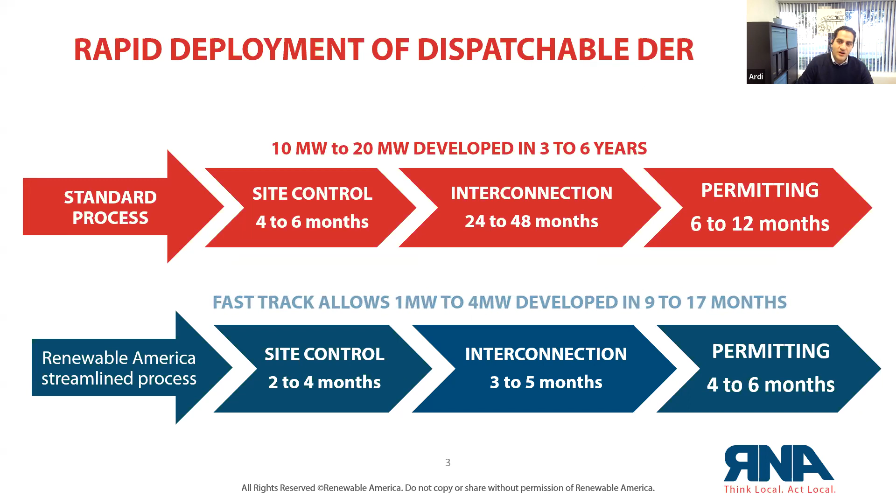Great. Okay. So I'd like to present today what we have worked on in the last 2 years, what we call a streamlined process to deploy DERs. This is an overview of how the market looks today, especially in California. If we compare two processes, bigger development, and I'm just focused here on 10 megawatts to 20 megawatts, compared to smaller projects, maybe we can call them small utility scale, 1 to 4 megawatts, you can see that the deployment can be much faster. Here's a comparison between all those activities, and the biggest change is interconnection and, of course, permitting. I will explain more about this later.

A little bit about what we have done in the last 2 years. As Woody mentioned, these are all grid side projects, or for other folks that might know it, front of the meter.

We have over 180 megawatts of solar projects throughout CAISO territory and 298 megawatt-hours of energy storage under development. We have assessed over 1,000 parcels, have been in touch with more than 400 landowners, and the projects are in about 30 locations in general. They have different stages of development, and here you can see where all of that is; whoever is interested can go on our website. There is a good overview, and we're keeping it updated.

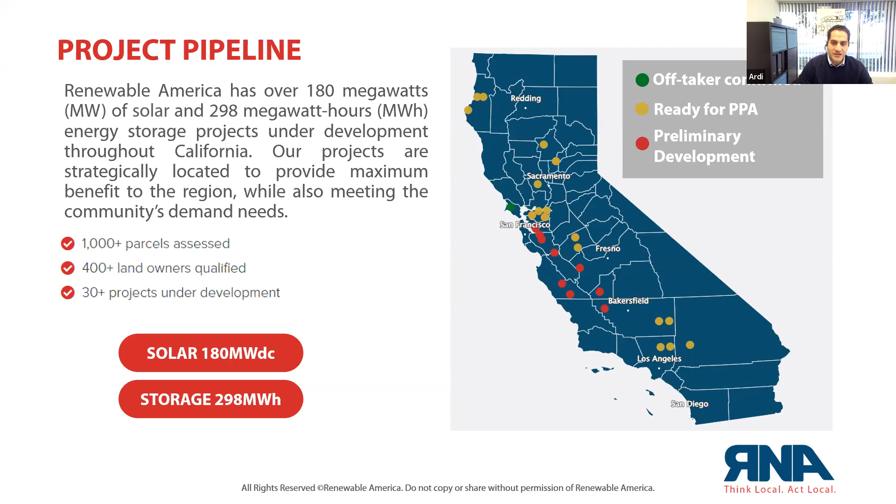Now, one of the biggest challenges, and we keep getting into that conversation, is RA. Resource adequacy is one of the most important things today, especially for CCAs, and we do understand that. And I decided today to make one slide to show the different ways that a DER would have, depending on how it starts with the interconnection agreement. So what I showed you in the slide before, the fast track deployment that allows us to be much quicker, would limit us to just 2 scenarios.

So we would be an energy only resource, and then there would only be a possibility to go through an annual DGD assessment, which is totally out of our control. It's basically CPUC allocating DGs into that portfolio, and then investor-owned utilities would have to choose that substation. And unfortunately, in the latest one, 2020, CPUC has not allocated any DGs. But we don't know for sure. We're hoping it's going to continue in 2021. This path was not working.

Now, what is exciting for us, we want to show here, there is a way after COD, so the project reached commercial operation date and is already operating. There is another process called transmission planning deliverability allocation, so-called TPDA, and that would allow us within 5 months, starting every November, to get the RA value and the RA piece. So what we are offering, and that maybe could be a great idea for any other developer or other CCAs to think about, is to purchase projects in an early stage without RA, and after COD get the RA piece.

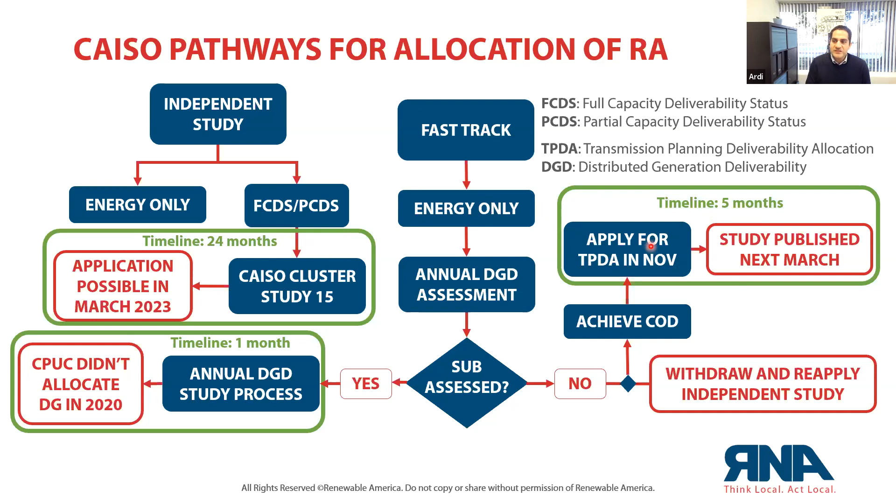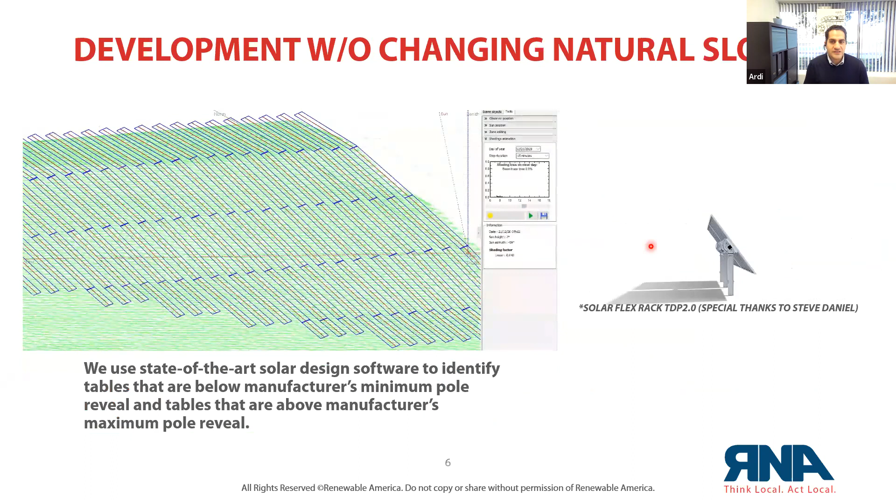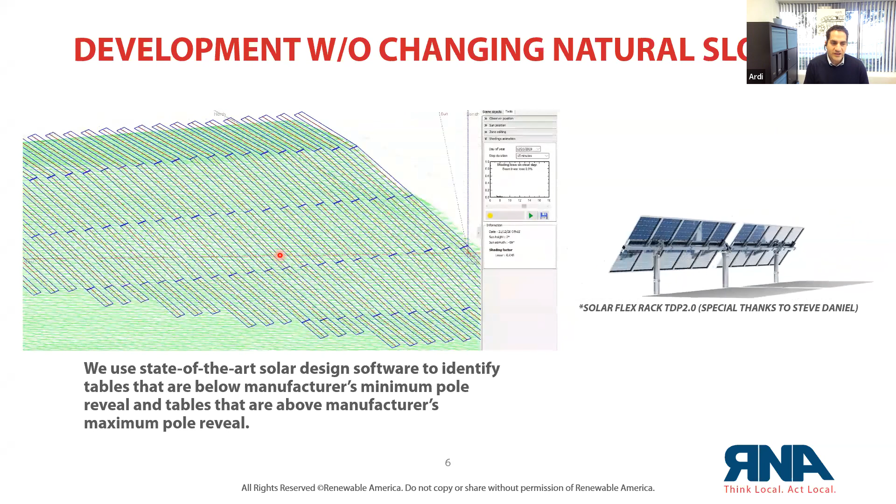We also want to show that in our development, we pay a lot of attention to how we can mitigate any kind of impacts to the land or to any other resources there. And we are using pretty good software that allows us to minimize grading. This is a single axis tracking system that we are showing on the right side, and on the left side, a screenshot from the software that can, without changing the natural slope of the land, so we avoid any kind of grading, install those systems. It makes it much easier for the CEQA process, and we also believe that allows us to continue in the best way the deployment of DERs.

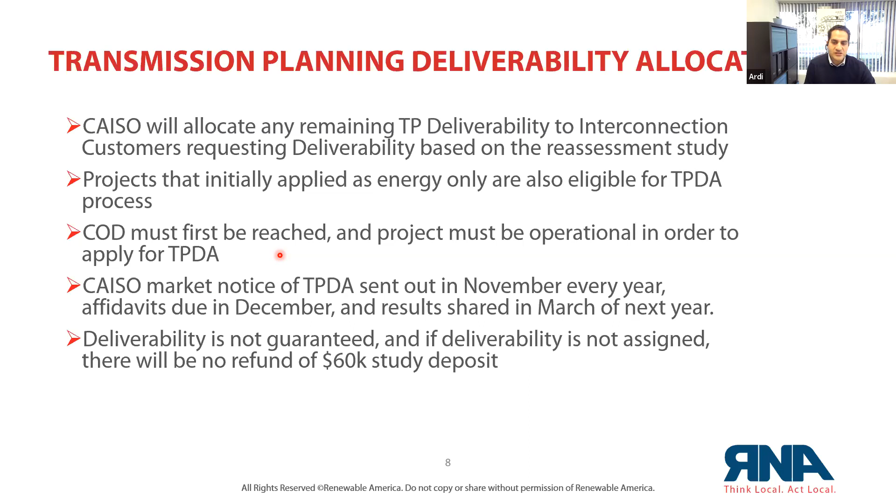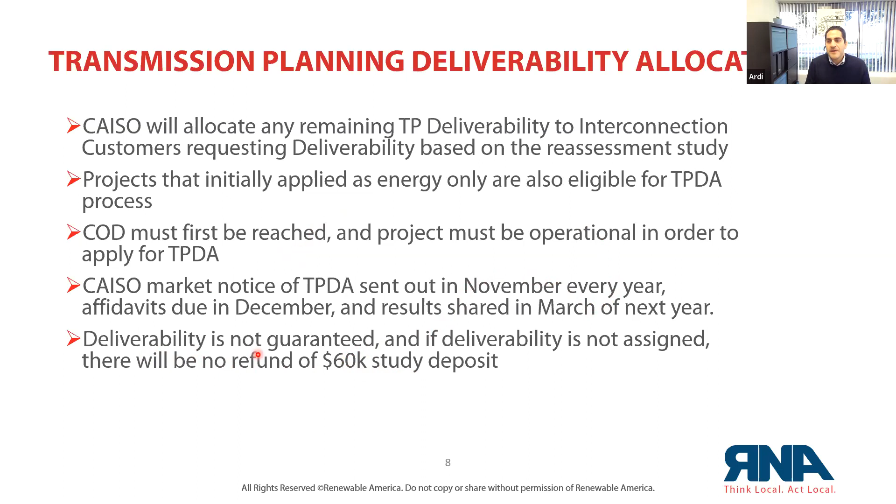Now, I want to tell a little bit more about this transmission planning deliverability allocation, the TPDA. CAISO will be able through this process to assess the capacity deliverability possibilities throughout CAISO. The process is outlined here. As I mentioned before, every year in November, we can get started with it, and the results will be shared the next year in March. Instead of waiting 2 years, we can do it within 5 months. And the deliverability study deposit is about $60,000. So it's all reasonable. Of course, there is a possibility that no deliverability will be assigned, or the cost is just too expensive. Of course, we as a developer would take that burden.

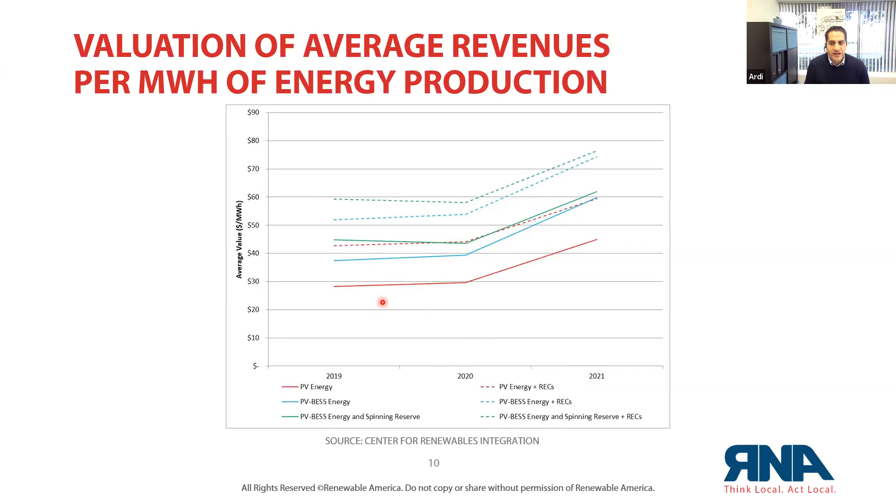This project has already been vetted by the PG&E CMEP team, and we're talking to VCE about it at this particular moment. It's just an example of how we could continue with other places and other DER projects that have the opportunity to become community microgrids as well.

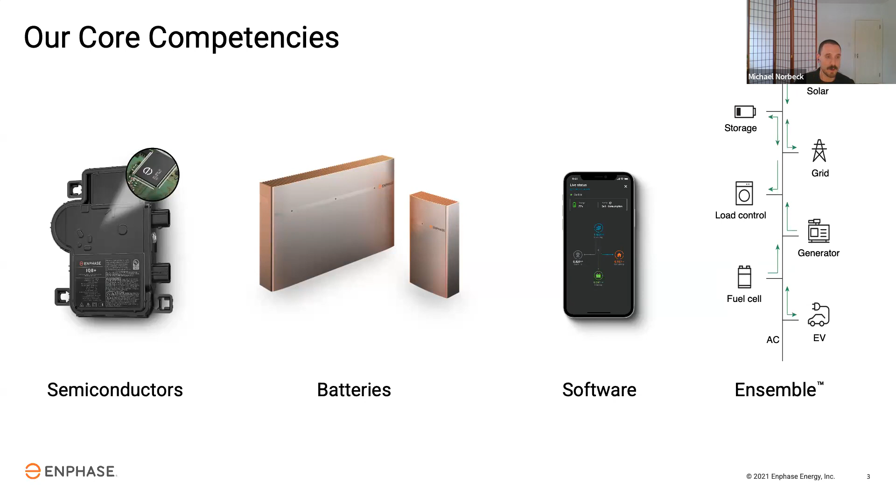And then we also are in the final stages of purchasing Clipper Creek, which is one of the largest EV smart charger manufacturing OEMs. We will be finishing that acquisition later this month, but essentially that brings a whole new set of capabilities under our load management framework, which should be very powerful for customers.

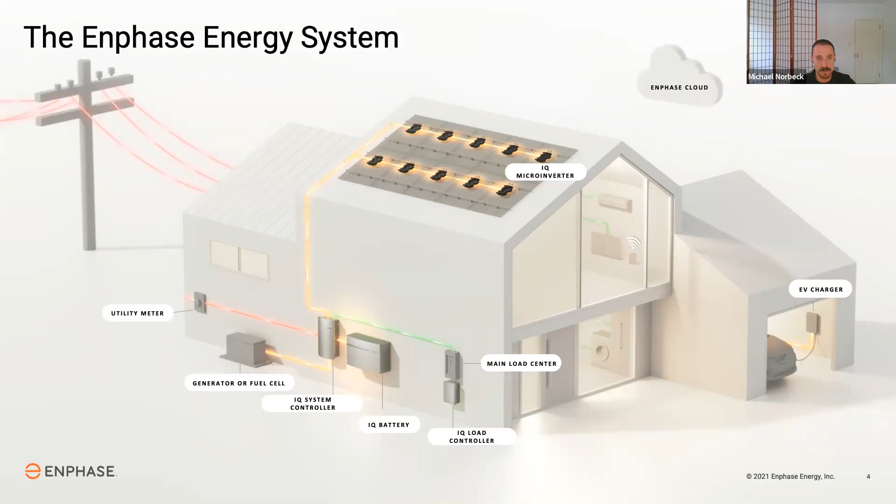So a little bit more about our software. When we say autonomous decision-making of DERs, this essentially means the customer can set different profiles for how they want their system to operate. I want to maximize my savings under a time of use tariff. I want to maximize my backup capability in the event of a grid outage. I want to maximize the amount of solar that I consume on premises and minimize my exports to the grid.

I want to make sure that if a storm is coming, my system defaults to charge up my battery as quickly as possible and leave it at a steady state to help me power through a potential outage. All those different customer preferences can be translated into decision-making at the DER level. So how does the solar and the battery and other controllable loads at the customer premises interact to achieve that desired customer end state? So our software does that.

This allows us, of course, also to seamlessly transfer the customer on grid and off grid. So if there's a grid outage, the customer can island safely without any glitches, keep all the appliances running, keep the internet on. When the power comes back on, they seamlessly transition right back onto the grid. The user can control the settings for their devices via cloud architecture enabled by the software. It's a pretty cool piece of technology.

One thing I didn't mention is we are now launching the first microinverter, really the first inverter period, that allows for daylight solar backup. As a lot of folks may know, if you have solar only at your house and the grid goes out, your power doesn't stay on. It creates an unsafe operating condition if the solar system can't island, and traditional solar inverters don't island. So our new IQ8 inverters, to get a little wonky, really allow solar backup during daytime if there's a grid outage. It's a full microgrid forming inverter. That's coming soon, a pretty cool product. It just allows us to deliver resiliency and bill savings to more customers, even if a battery isn't really on the cards for them.

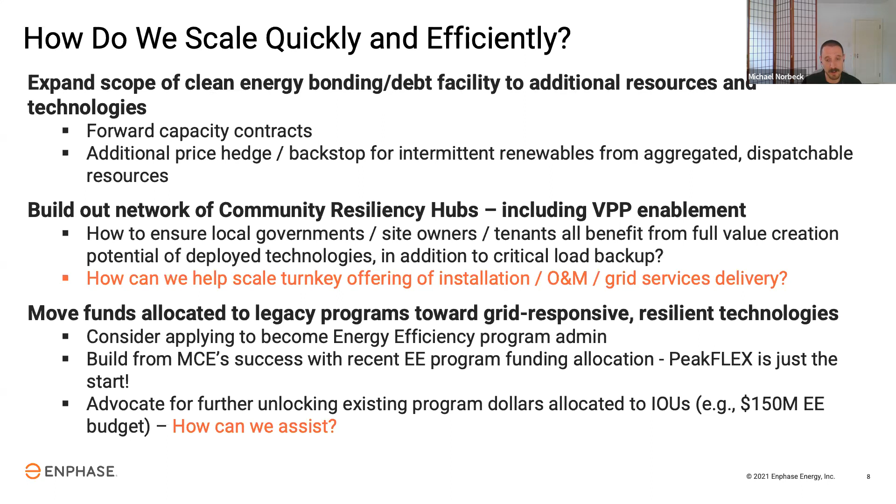We are going to move next to our CCA panel. Before we do, we do have some questions coming in, and that's great. Already starting to see a little bit of a theme on questions around yesterday's CPUC decision on NEM. So CCA folks might want to touch on how that might impact things.

I would like to move on to introducing our CCA panel. We're going to hear first from Eric Little, Director of Regulatory Affairs at the California Community Choice Association. Then we'll hear from Jim Bach, Distributed Energy Resources Manager for MCE, and then JP Ross, Vice President of Local Development, Electrification, and Innovation for East Bay Community Energy. First, let's go to Eric. Eric, the floor is yours.

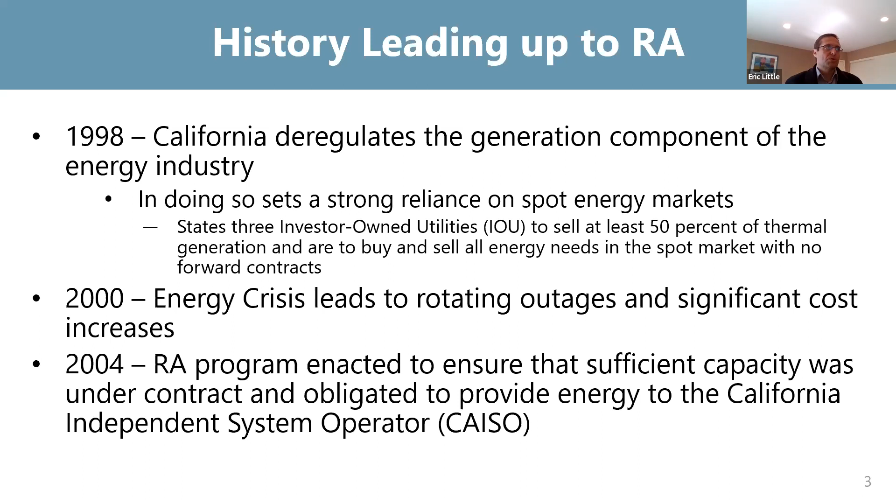So the RA program really looks at a fleet of resources necessary to reliably operate the grid, and that if only that set of resources showed up, would the grid be able to operate reliably? So it meant looking not only at the peak, but all hours. And in looking at all hours, they use some methodologies to try to deal with that.

Obviously, if you meet your peak load with resources that are available 24/7, you are well over procured for the hour of the lowest load. And so there were some mechanisms in there to be able to deal with shaping.

There were also originally kind of these two categories of resources that met resource adequacy, and one was supply side type of resources, which is typically thought of as generators. Energy storage now as well, which is not a generator, but is an entity that can dispatch energy to look a lot like generation during periods where it's discharging.

And then we had load modifying, which was really the idea of, well, okay, maybe I don't need to serve all of that load because maybe I can prevent the load from existing. And that was things like demand response and energy efficiency types of items. And I'll get into a little bit about how these things become difficult.

So let me also pause here for a moment because I don't have it in my slides, but it bears some clarification. When it comes to distributed energy resources, there's kind of two types. There's in front of the meter and there's behind the meter.

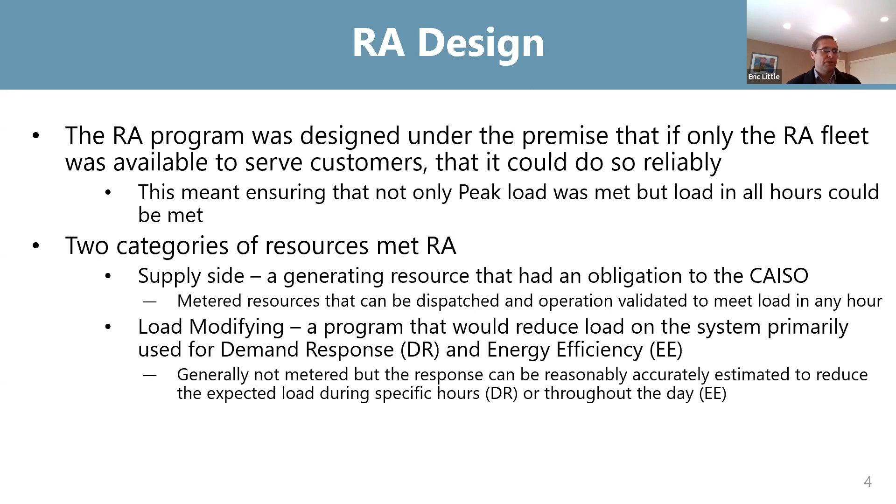So why has the RA program been so difficult for these distributed energy resources? And I'm really going to look at the behind the meter because, again, for the in front of the meter, I don't think it's as difficult. It does have the other problems that were noted, but the behind the meter is really where the struggle is.

And it's because of this issue that really the desire has been to have resources that I can dispatch. So the California Independent System Operator wants to be able to tell a resource, generate or don't generate. It would love to be able to tell resources to consume or not consume as well. And in some cases it has those capabilities, but not in all.

So when you start looking at those types of activities, the ability to dispatch a behind the meter resource becomes very difficult. And in fact, demand response, which started off as this load modifying resource, became a resource subject to dispatch and is bid into the ISO's market now as a resource instead of just as this kind of behind the scenes load modification that can happen.

The main reason for that is that price signals are an important indicator of when there is grid stress. If there is a reliability problem, you would expect prices to go up. And when those prices go up, you would expect load to be lower and you would expect generation to be higher to try to take care of the grid problems that you're having. So even on the load modifying side, the commission and the California ISO really pushed to move those resources onto a supply side.

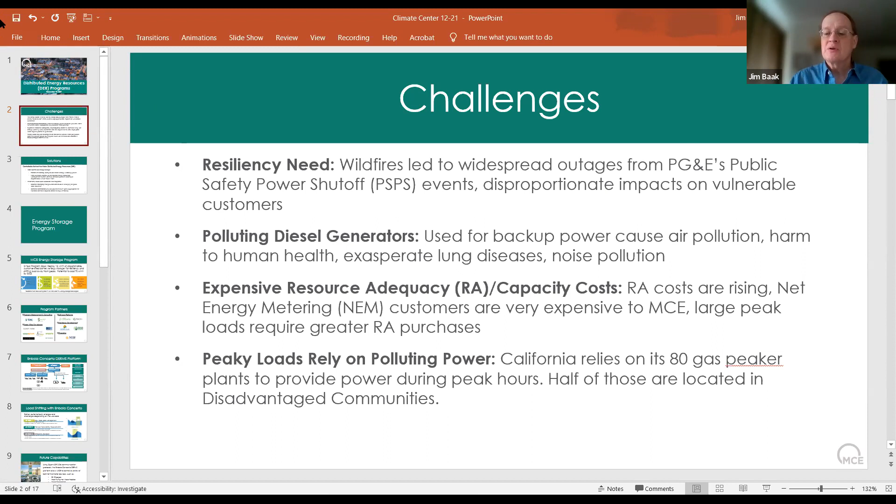Peak loads generally rely on polluting power, so we want to reduce the amount of peak demand so that we can reduce that polluting generation on the grid as well. So we're doing this through a number of different means for behind the meter resources. Our energy storage program is going to be energy storage paired with rooftop solar, existing or new. And in that model, we're actually going to be directly controlling these behind the meter resources via a DERMS platform, a distributed energy resource management system. And so we'll be able to monitor and dispatch all these aggregated systems in a virtual power plant.

And right now, these are going to be out of market. The strategy is really looking at reducing our peak demand. That will ultimately reduce our capacity forecast that the CEC does and the resulting resource adequacy. So we're reducing our resource adequacy requirements through these programs rather than participating directly in the market. And there's a number of reasons for that that we can get into through the questions that I want to pose to some of the presenters. But we found it more effective to directly control these loads and get the full value for peak load reduction. And this energy storage program is one way of doing that.

We're looking at some other pilot programs that do incorporate market integrated resources, so we could participate directly in the ISO market. And our DERMS platform has the capability of doing that. Right now, there's a lot of hurdles to getting into the market, as Eric indicated briefly. We're looking at other types of load reduction pilot programs as well. We have a smart EV charging pilot that provides controllable EV charging for peak load reduction through a third party.

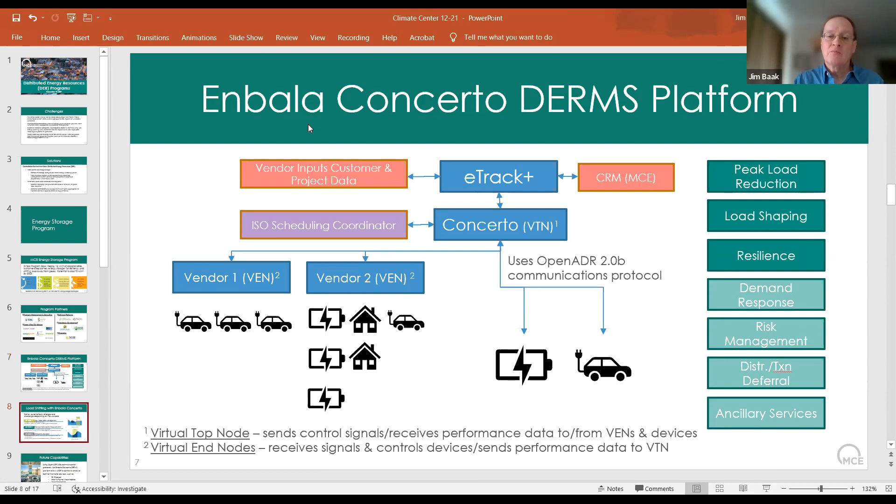And the idea is to try and get as many of these different devices behind the meter monitored and controlled, and be able to respond and shape our loads to better match our cost profile. So it's a way, again, of helping us reduce our costs for all customers. And the platform really just relies on getting these vendors to input data into our software platform, and then we are able to directly control using an open source communications protocol via devices or signals to the developer.

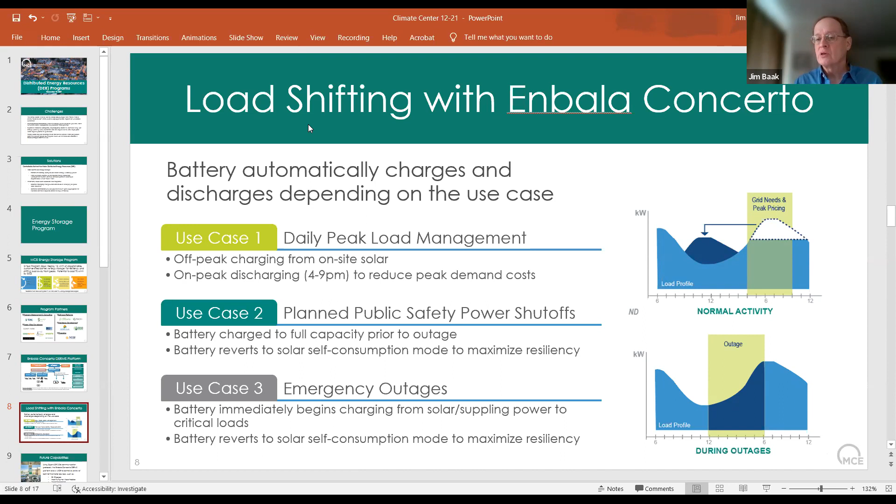And mainly right now we're looking at daily peak load management. So we're charging these resources directly from solar every day, and then discharging them during the 4 to 9 p.m. peak period. But we also have the ability to do pre-charging for announced public safety power shutoffs. And of course, in emergency outages, the systems will go into backup mode. And these systems are owned by customers, not by MCE. All the assets, all the systems are owned by the customers, and they agree to allow MCE to program the systems.

Future capabilities, as I mentioned, EV chargers, heat pump hot water heaters, all of this using an OpenADR communications protocol, so that gives us the flexibility with open source protocols to switch vendors for the DERMS platform if we needed to. And then we're looking at potential future value streams. As Eric mentioned, we're looking at resiliency values for both the grid and the customer, risk management value, including congestion revenue rights, wholesale market participation for either RA, load shift, ancillary services.

And we're getting some of the benefits of peak load reduction, wholesale cost reduction, greenhouse gas content reduction, and NEM supply shift value, as well as potentially either transmission or distribution system deferrals. It does help us also retain our customers and provide economic development through the workforce development elements that we have.

So that's just a very quick overview of our energy storage program and our other behind the meter resources. But to sum up, we really see these behind the meter resources and distributed resources as a way of becoming a larger and larger part of our resource portfolio, and essentially taking control of our own destiny using these customer embedded resources.